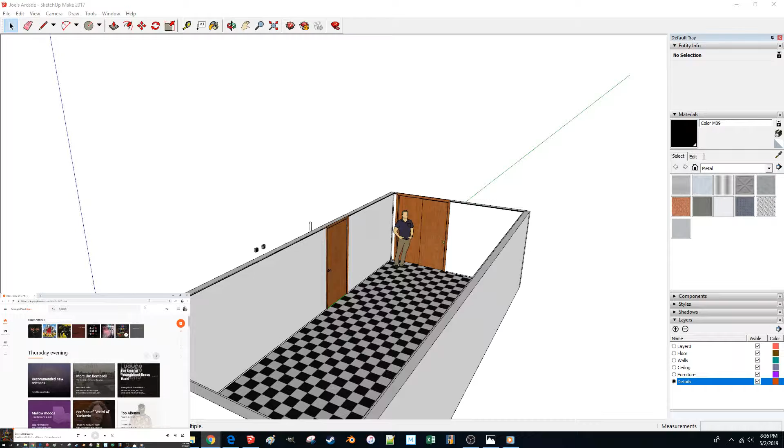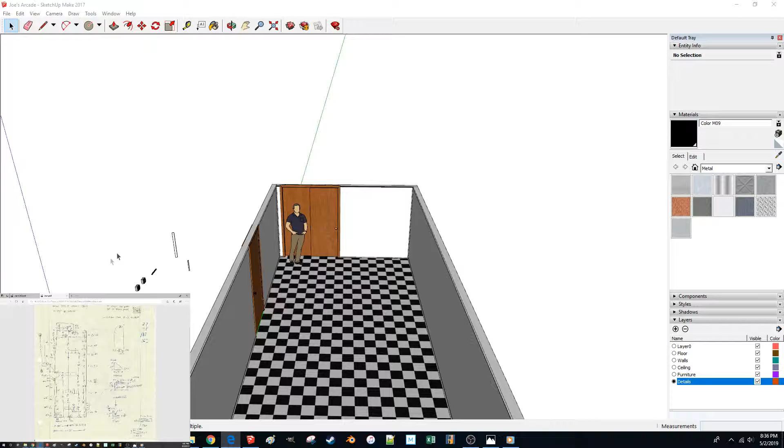This is probably going to be the world's quickest episode of Joe's Arcade, just because I'm a little pressed for time but still want to get something done this week. So without further ado, I think we're going to listen to Polygondwanaland by King Gizzard and the Lizard Wizard in the background for some tunes. Just want to get a little something done this week, and that's going to be getting the ceiling in and hopefully some of these light box-outs. So let's just get it done real quick.

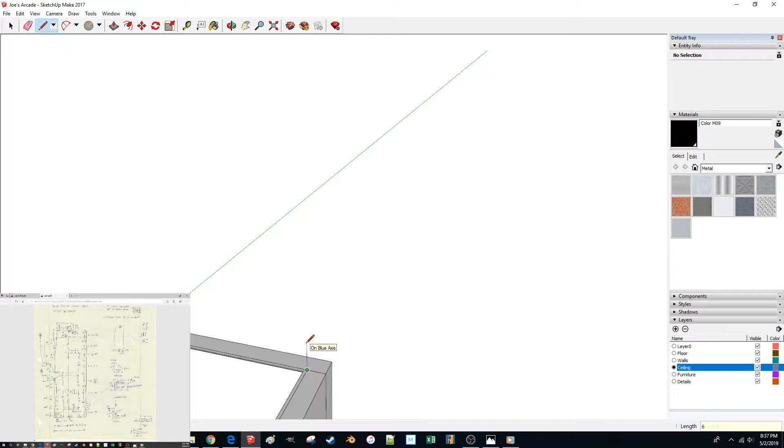Before I do anything, I'm going to switch to my ceiling layer. This is going to be a little bit simpler than reality, since ceilings in a model like this you don't actually use that often, but sometimes you want a view from inside the room, which is why I'm creating this. We'll do it pretty much like the floor was created, just create a little rectangle here, pull that out to the length of the room, and group it up. That's going to be my basic ceiling shape.

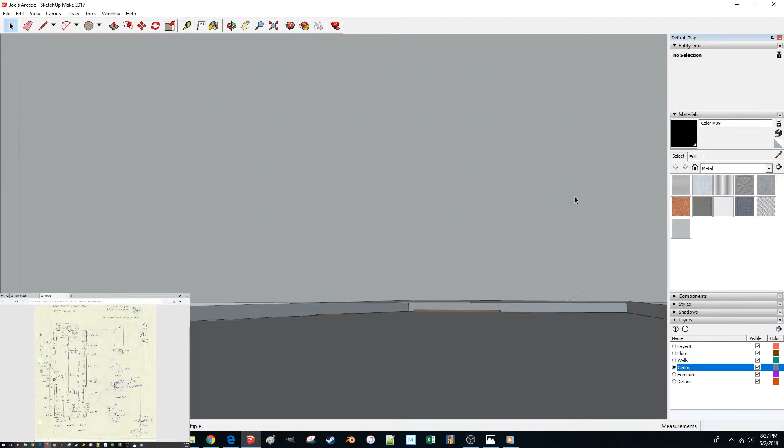Now to work on this, I'm going to turn off the floor. It's going to get a little bit trippy in here. Ooh, check that out, some scratch line work that I don't want around. I can definitely get rid of that. Here's my floor—yep, nothing deleted there that I needed.

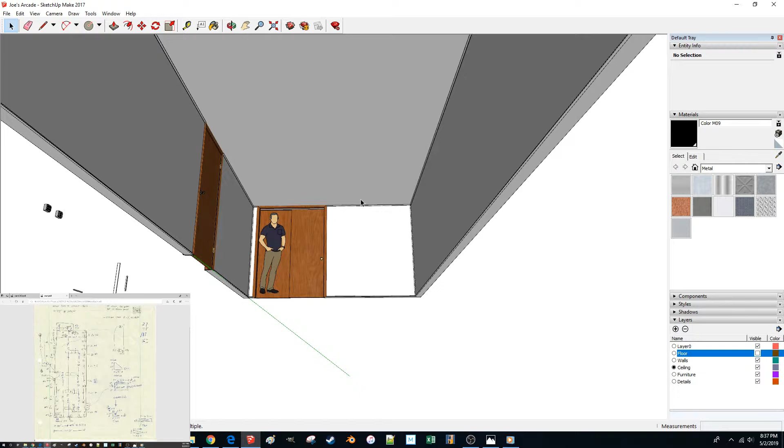Okay, so the ceiling—the other detail in the ceiling is we've got some lights, measured starting from the back of the room, and there are 4 of them. I've got some dimensions to work off of, measured as the width of the individual lights. I got them at 11, 11, 11 and a half. Then this one I had at 10 and 3/4.

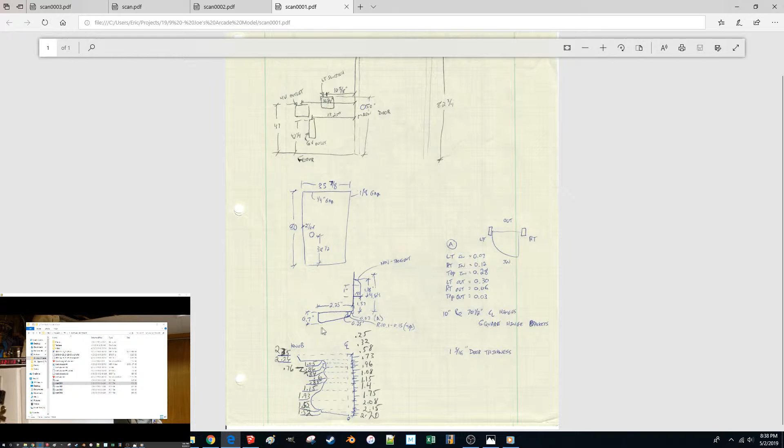So what I did is I measured this one and then the others. Looking at that, I'm going to take the standard dimension they're intended to be, 11 inches. You always get some variability with what's truly installed, so I'm going to do an 11 inch by 46 and a half light area. Around that, since this is inside to inside, we've got some trim, which is pretty much—that's the wrong PDF there—the same dimensions as what we had around the door, just a different color. So that's going to be helpful as well.

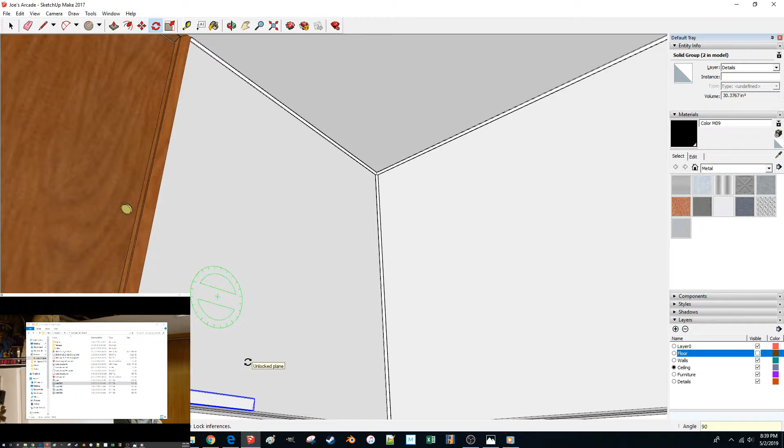I've actually got a piece of that right here, so I'm going to copy that and bring it to where I can work with it. I'll take this bit and rotate it to get it into the plane I really want to be working with, so another 90-degree rotation there.

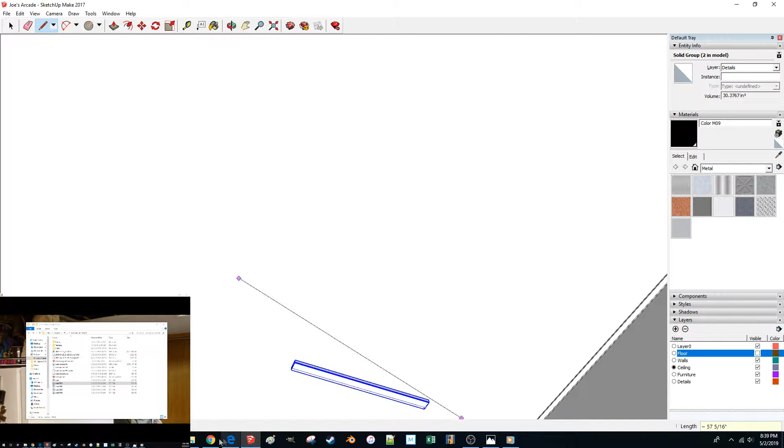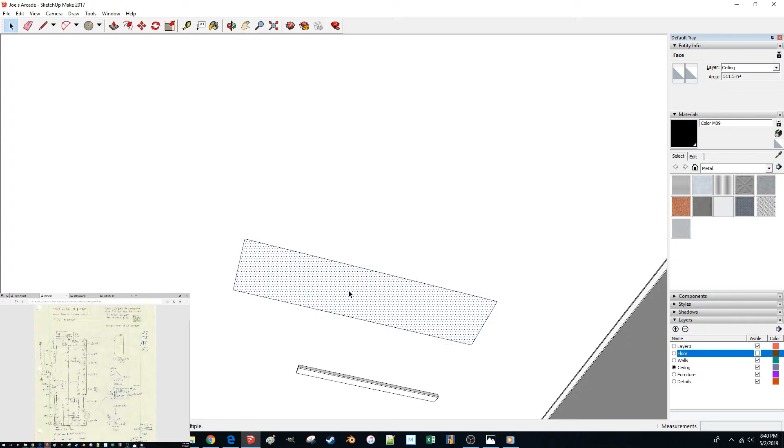So I'm going to be working with that on the ceiling here. What did I say, we were looking at 46? I'm going to check my dimension here. 46 and a half inches. 46.5 by 11 inches. And that's made a face here—I don't actually want that, but I'll get rid of it in a short bit.

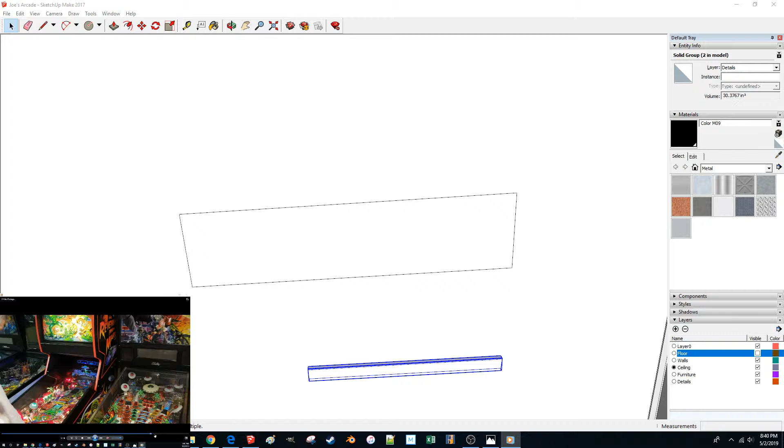I mostly want it just for a boundary. The other thing I want to check is where the tall side and the short side are on that light. I'm pretty sure I know, but I want to double check. The thick side versus the thin side—somewhere around here I had a good view of it. Oh, there we go. Yeah, the thick side is on the outside, kind of like you'd expect, which means I have this oriented correctly to go on that side.

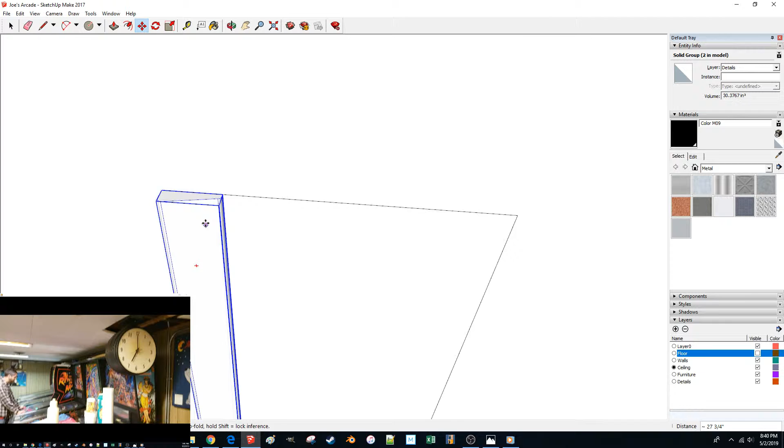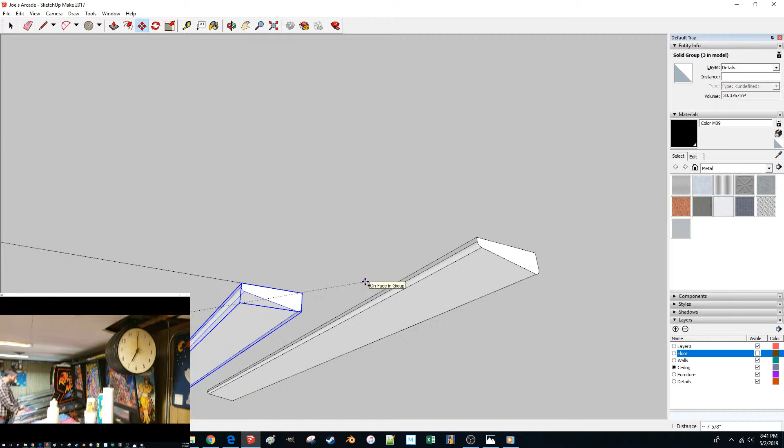Okay, next I'm going to give it a copy, and I could rotate it 180, but I'm lazy, so I'm just going to scale it instead, and move it over to there. Copy another one—actually, let's be strategic about this. I'll copy 2 of them and rotate them 90.

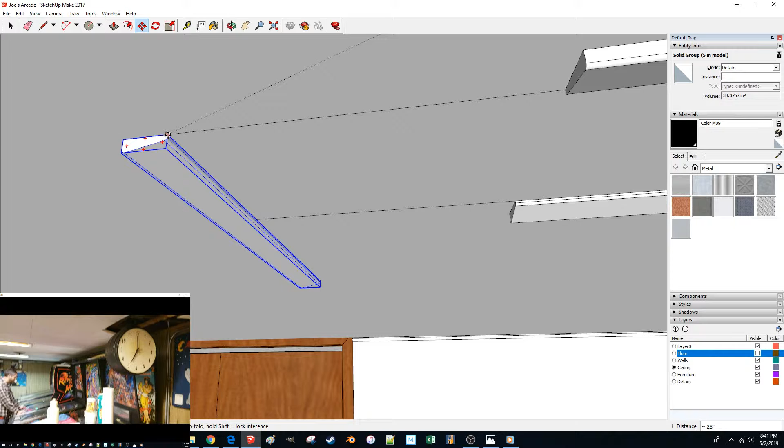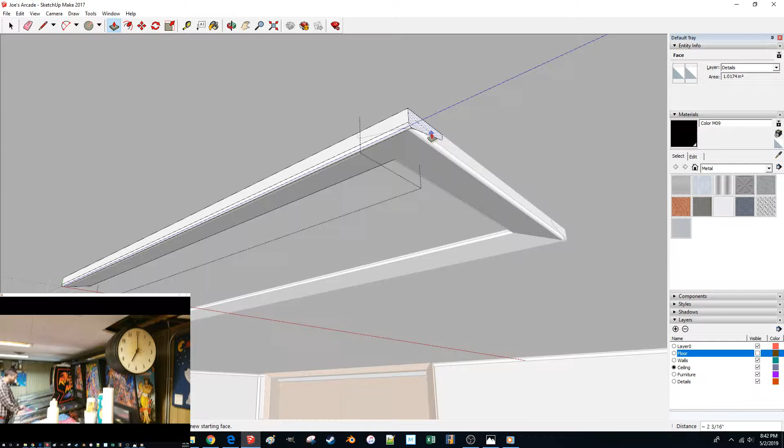And then I've got my edges there and there. Okay, so the next thing I want to do is just extend these guys to the length they should be, or trim them in this case. So extending... and trim that one. You can probably see where this is headed—that one was already in the right spot. It's headed towards an Intersect Faces with Model command.

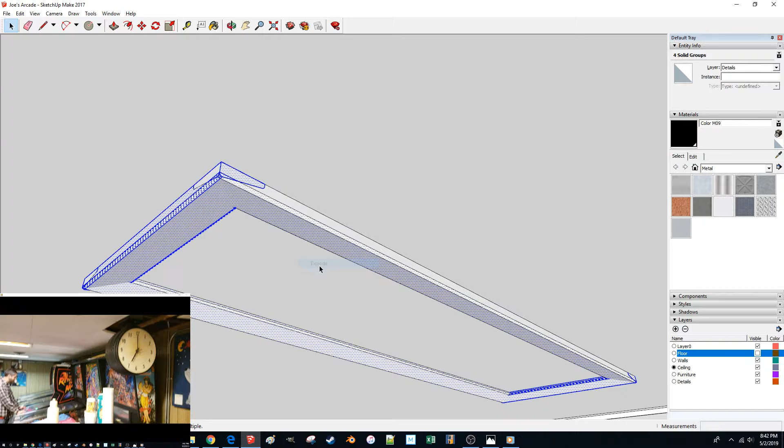Again, just one of the most handy commands out there, I think. So we'll delete that so I don't have those lines sitting around—or Intersect Face with Model, what was I talking about—anyway, I'm going to delete those so I don't have them hanging around. I'll explode these groups, grab them all, and intersect faces with model.

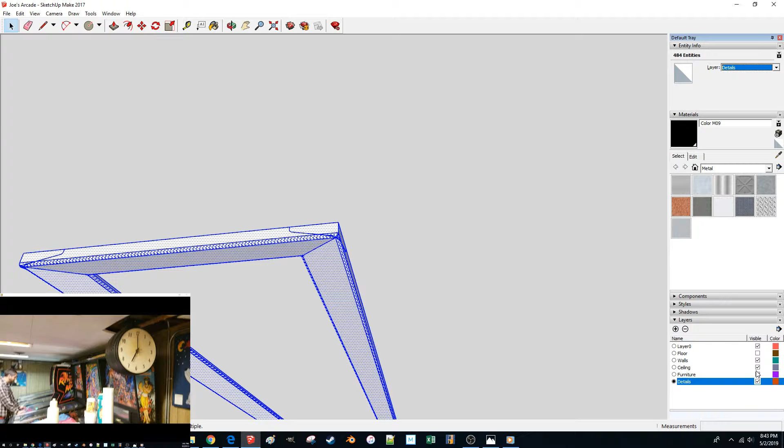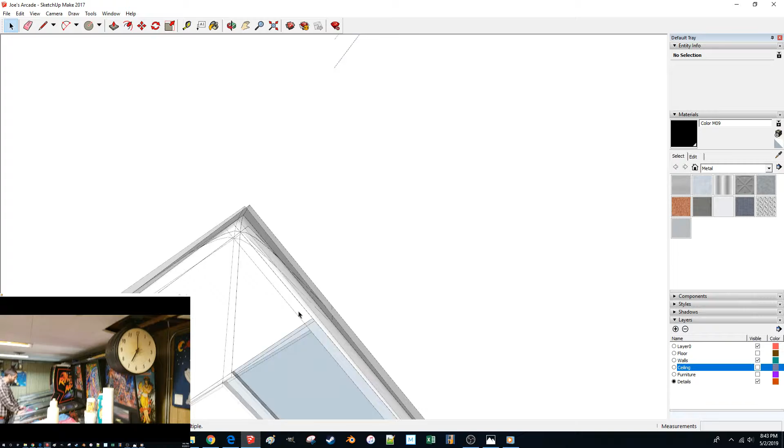Now this has created some truly horrific geometry, I won't lie, but hopefully it can be some pretty easy cleanup here. I'm going to grab these and put them on the details layer, which is what I should be working on for this. Now that I've done that, I'm going to turn off my ceiling layer, and I guess my furniture layer too, but I'll just turn off the ceiling layer. That'll make it a little easier for me to see what's going on. Delete that and some of these faces in here. Got all kinds of lines that are going to have to get cleaned up.

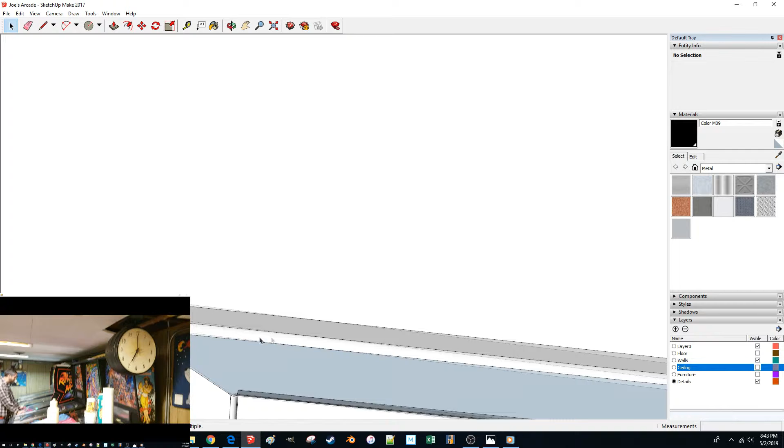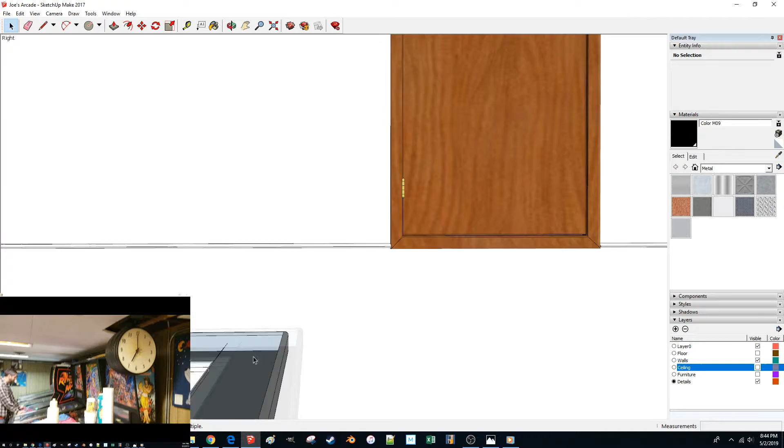Ooh, that arc exploded a little bit more than it should have for some reason. Let's see what happens if I connect that. Yes, I do get my face back. So that's good. I'm going to try to make this a little bit easier to see, actually. And, ooh, working upside down. That's tricky.

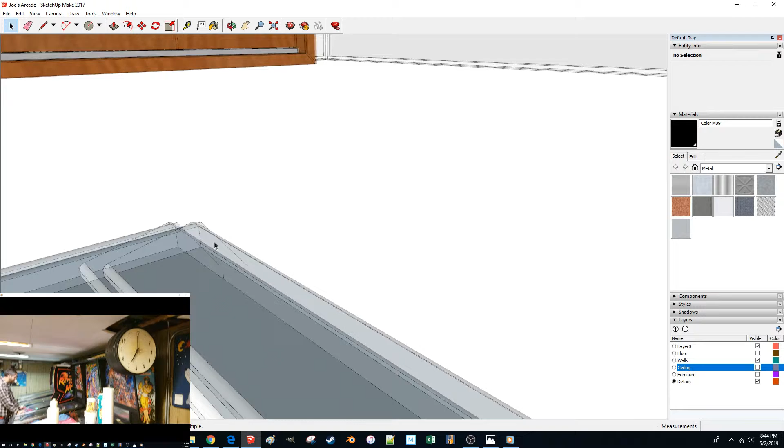But I'm going to delete this center thing. I think that'll make it a little bit easier for me to get in here and be deleting what I'm after, be able to see more easily what I'm selecting. Lines galore, though.

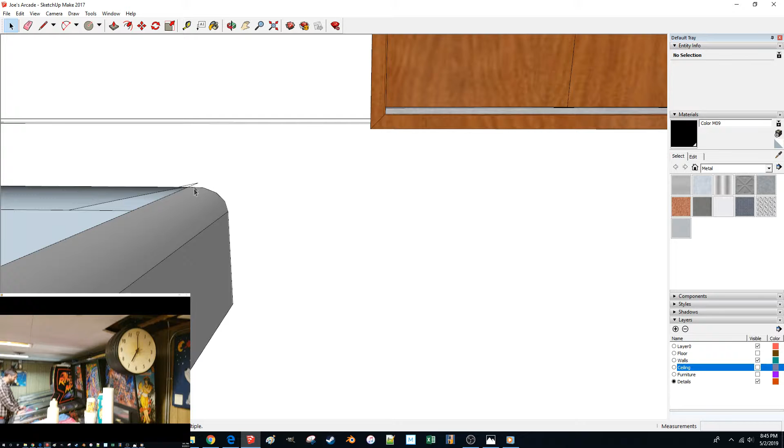I'm glad I didn't use more face definition than I did on this thing. It's always kind of a balance of, is it going to be a pain to work with versus is it going to look nice? Look at SketchUp Man there upside down.

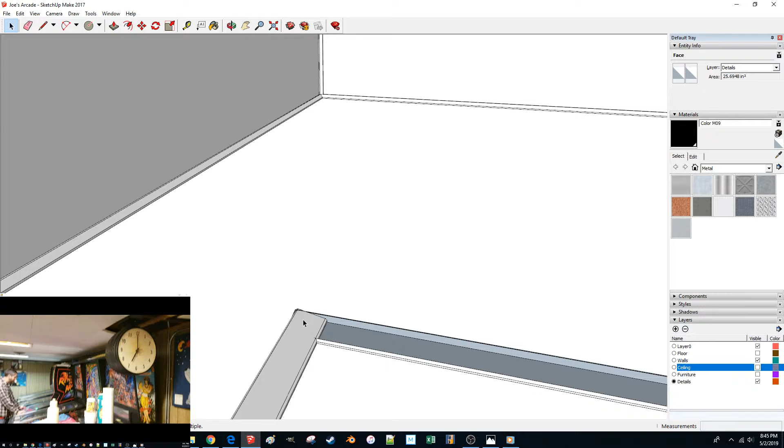Okay, I've got that done. Let's get that line and that line out of my way. Anything in here that gets deleted isn't desired anyway. Same thing there, these are just scratch lines.

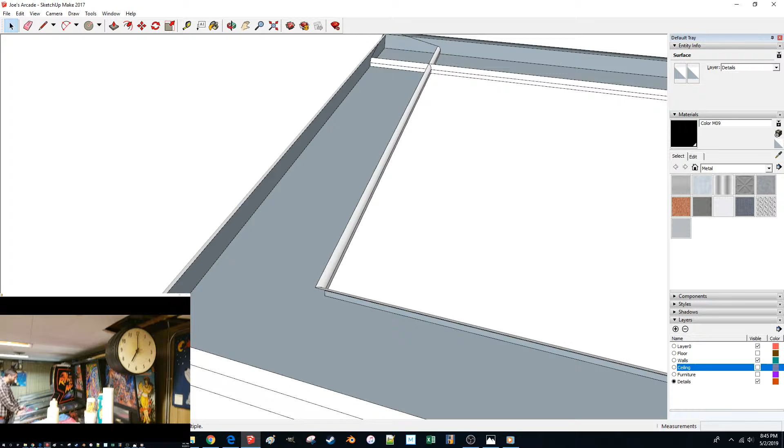And for whatever reason, these arcs on the ends seem to continually stay as a single arc, which I'll be honest, I'm not complaining about that. It makes it a lot easier to delete them. One corner to go here. Get both of those in one fell swoop.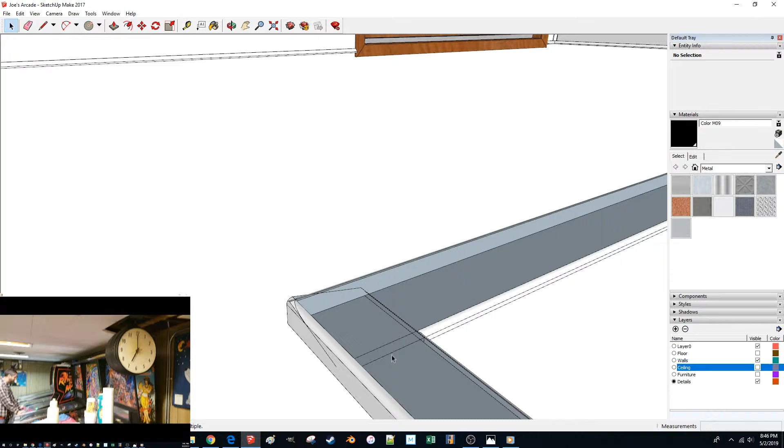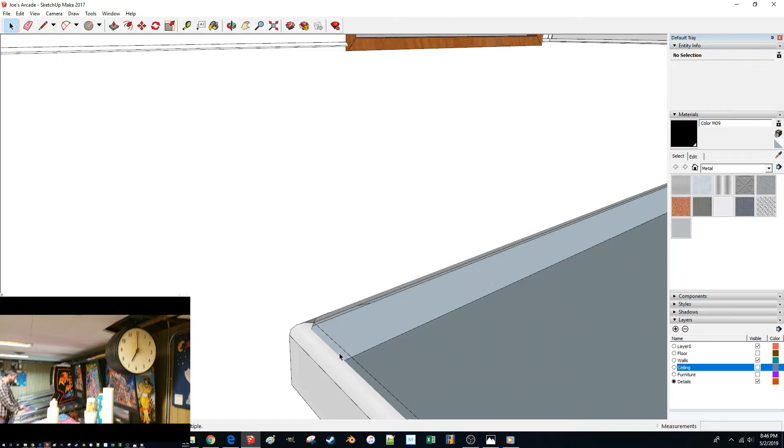And that's my edge I want to keep. Oh, I think I've deleted something here that I didn't want to delete. Let me bring that back. Try again. Yeah, I didn't delete that. That was part of it. And now I'll get rid of this.

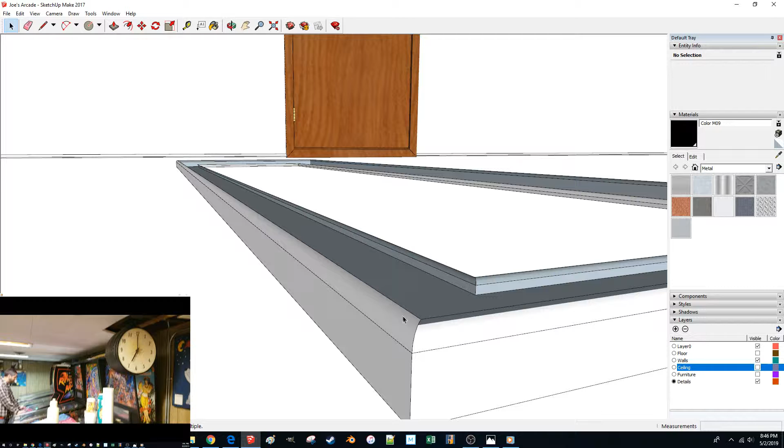Yeah, something has gone wrong here. I think if I do that, yeah, it'll bring it back. Okay, that's cool. And now I'll reconnect these lines, and if I've done everything right, they should face up.

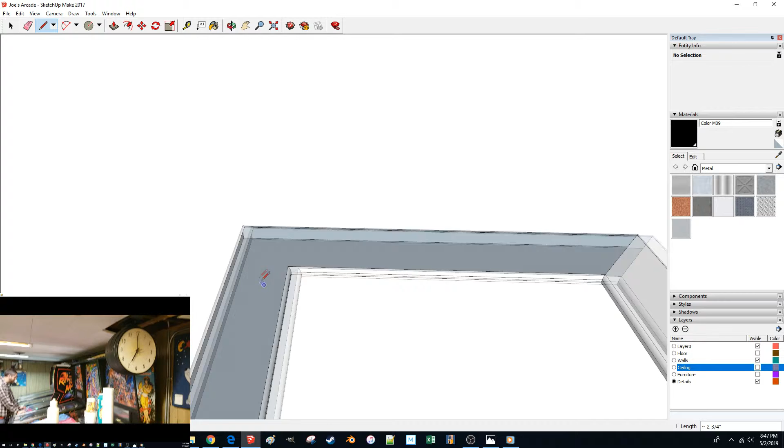That one's good at least. I want to get my correct endpoint here. There we go. Okay, sweet. So yeah, now I've created that.

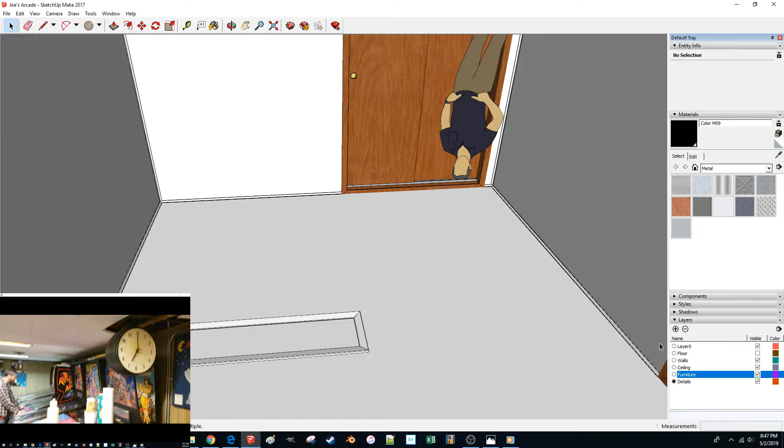And let's go ahead and bring our ceiling layer back on, and furniture. Shouldn't have been frozen in the first place.

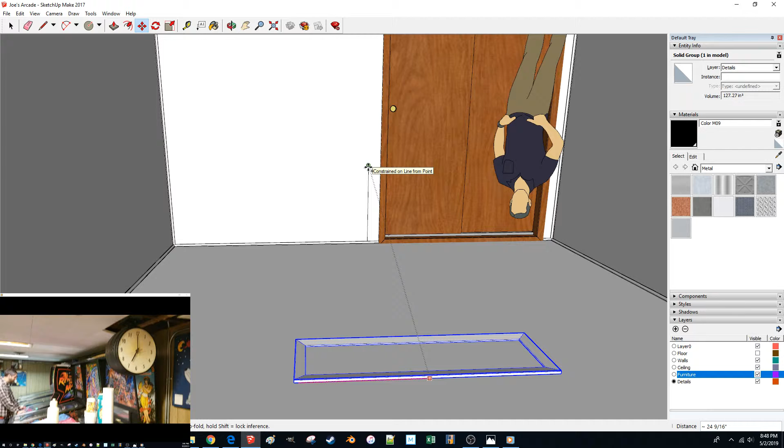I want to find the midpoint here in this and just draw a line through there so I can line up with it, because these are centered in the room, at least as far as I can tell from my notes. And I'm going to just align that to center.

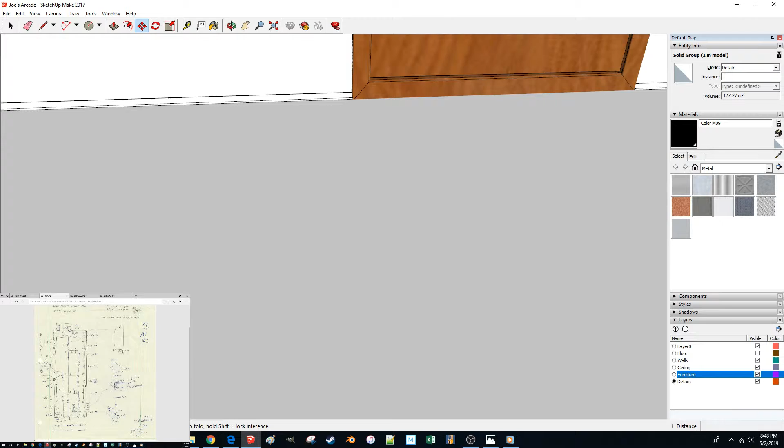Okay, so now taking a look at my notes, they're actually lined up from this back wall edge. So like that.

And let's see where I've got these things. I measured them to and from a consistent point, so it's going to be real easy to pull them off here.

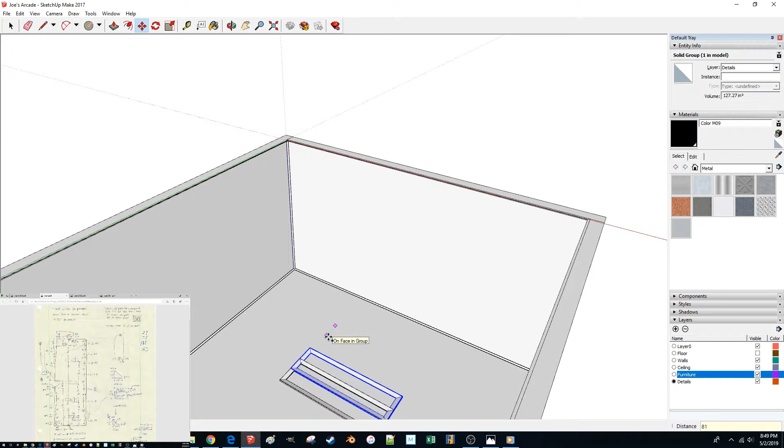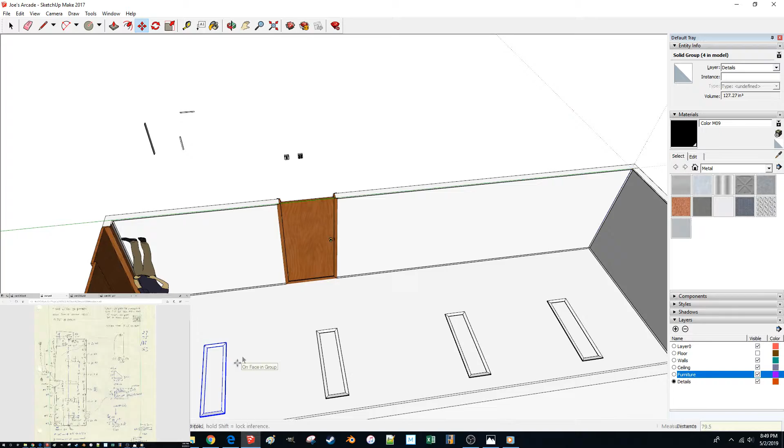First one is 47 inches. Next one is, from that point, 81.25 inches. Then we've got one at 96.75 inches, and that should be lined up with our door here, at least according to the rough sketch I've got. And it seems to be pretty close. This sketch is by no means to scale. And then we've got 79.5 inches to there. That I'd say looks pretty good.

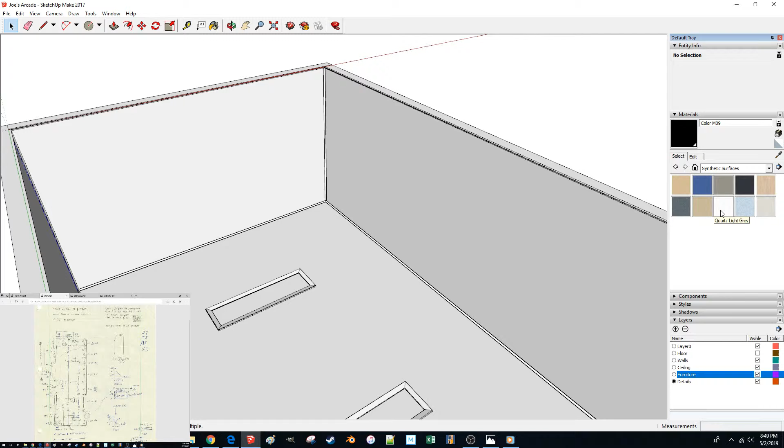Now these do have some texture to them. They're kind of like a painted white, so I want to just take a quick look and see what surfaces I've got, like this quartz light gray. I don't think this is going to be what I want. Well, I take it back, that looks pretty good, I think. If you don't look too closely at it, you can't tell it's stone. So I'm going to use that for these because they've got a little bit of like a textured paint to them.

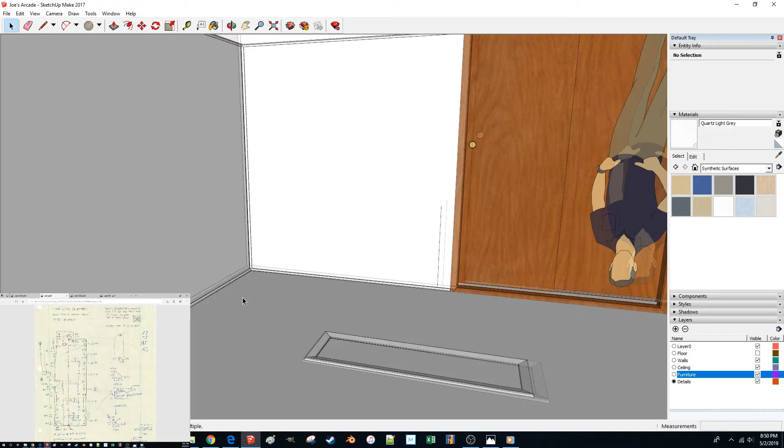Can barely tell from a distance, but some texture is always good, I think. Okay, so I've got those, and now I'm going to switch back to my ceiling layer.

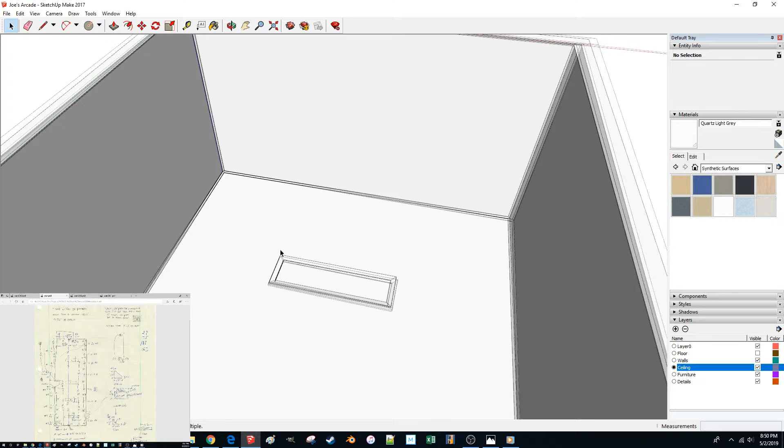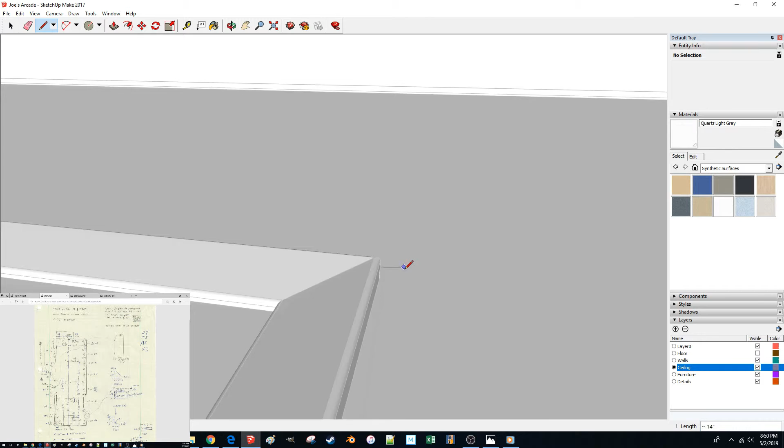Not going to do anything super intense for the lights right now, but I will jump in and just create a face on my ceiling surface that can get textured to kind of represent those lights. Oh, don't go in there.

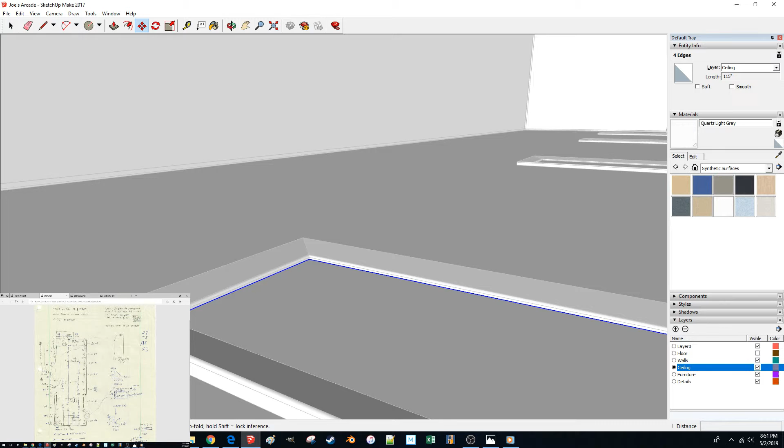And what I'm doing now is I'm going to copy the edges of this face to my other lights.

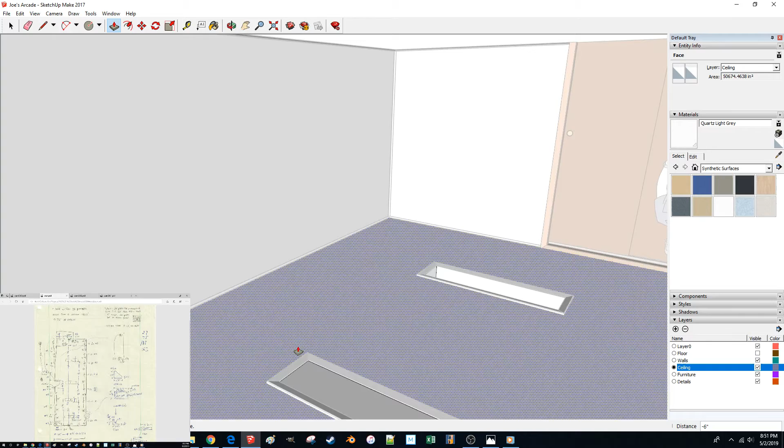Okay, I'll punch them through. This way, if I decide to do a more complicated light object at some point, I have that option. I'll break out of that group and just create kind of roughly what that object could be.

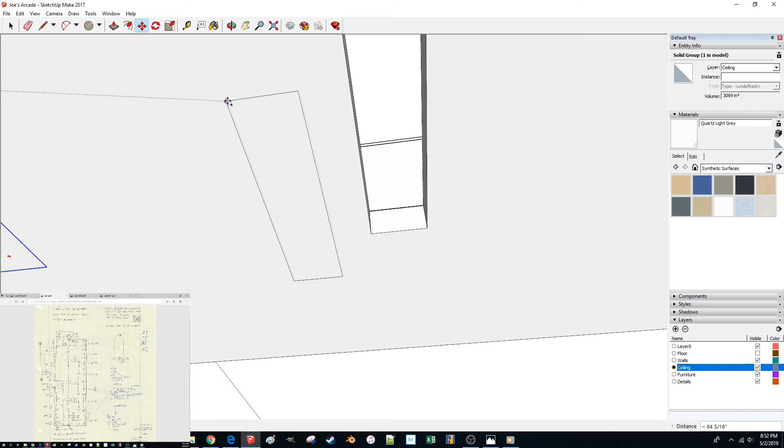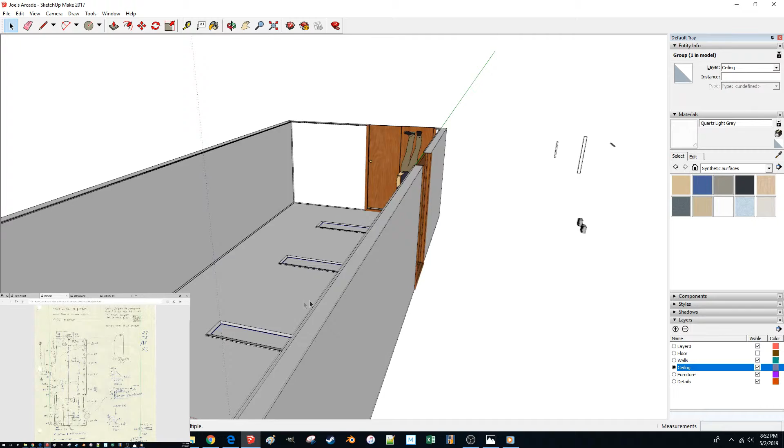Can't do a uniform offset, of course, because these aren't uniformly spaced, but there's not too many of them to copy it to. There's that. And I also want to group my ceiling and my lights together, because those should always be moving as a single unit.

Let's see what materials we might have in here that could look good for that. I don't think there's really anything that is going to wow me into using it here. Light textures are definitely not a simple thing to do, and these lights don't actually have a covering on them, so it makes them even a little bit more difficult to pull off.

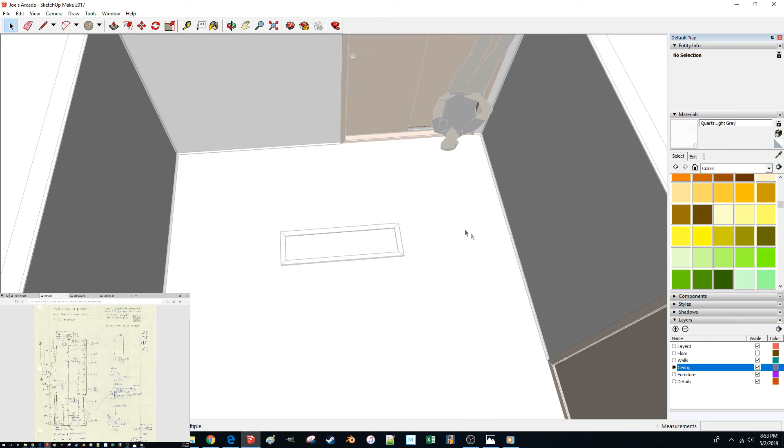Yeah, I think for the moment those are going to remain untextured, and I might come back and add a little bit more detail, maybe a photo texture or something like that, to kind of flesh that out a little bit more later. But for now, let's turn the floor back on. We've got our lights at least in position, and kind of easy to modify from there.